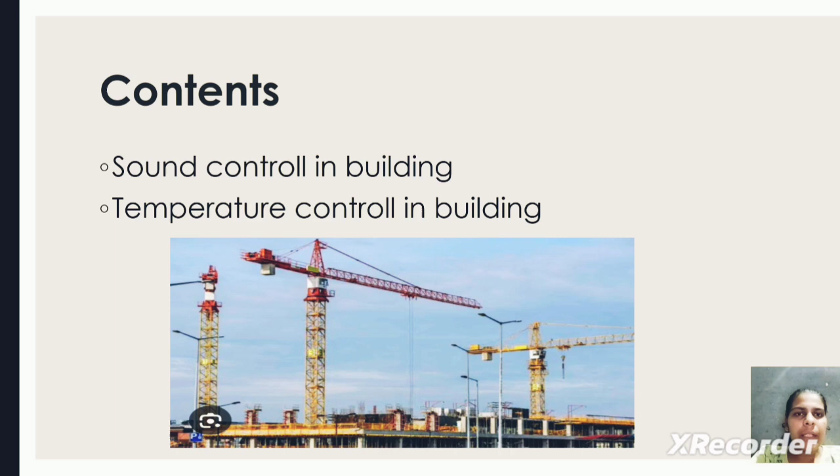I am Meghana Vaidya from Sri Venkateshwara College of Engineering, Bengaluru, from the Department of Basic Science, CSE branch. Now I am going to discuss the subject Introduction to Civil Engineering. In this subject, the subtopic is Explain the Temperature and Sound in Buildings. Contents are Sound Control in Building and Temperature Control in Building.

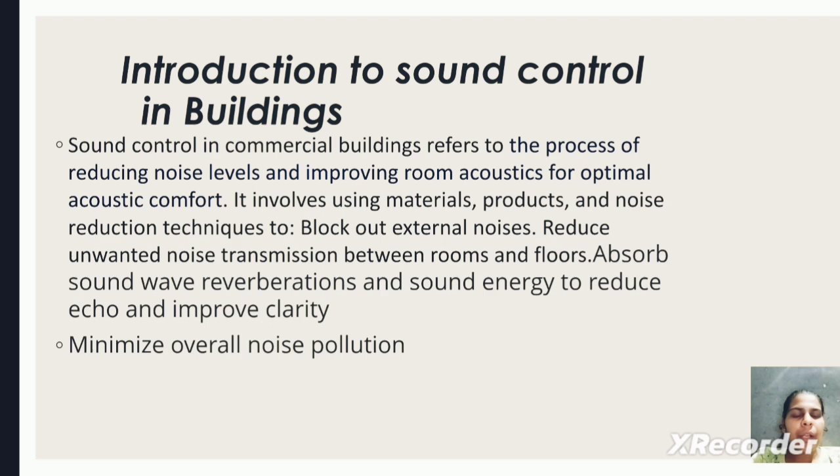Introduction to sound control in buildings. Sound control in commercial buildings refers to the process of reducing noise levels and improving room acoustics for optimal acoustic comfort. It involves using materials, products, and noise reduction techniques to block out external noises, reduce unwanted noise transmission between rooms and floors, absorb sound wave reverberations and sound energy to reduce echo and improve clarity, and minimize overall noise pollution.

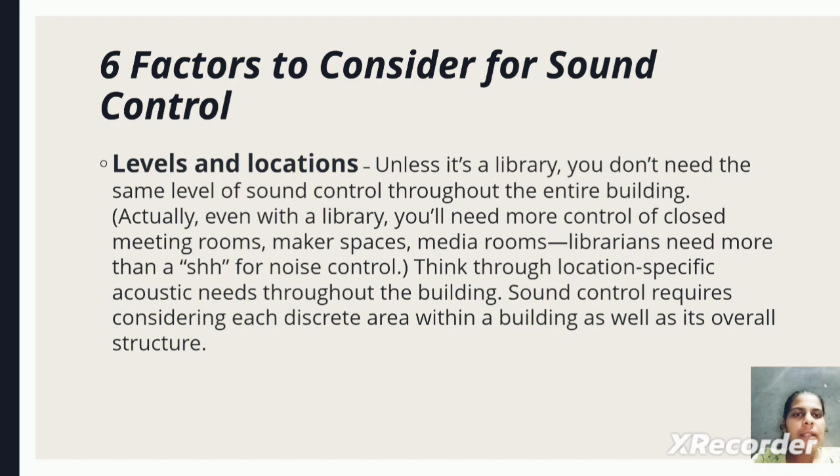Six factors to consider for sound control. First one: levels and locations. Unless it's a library, you don't need the same level of sound control throughout the entire building. Actually, even with a library, you will need more control in closed meeting rooms, maker spaces, media rooms. Librarians need more than a shh for noise control. Think through location specific acoustic needs throughout the building. Sound control requires considering each discrete area within a building as well as its overall structure.

Building age and construction. If you are starting from the ground up, you will have the ability to influence each decision in materials and construction that impact sound control. For businesses in established locations, there are many options to boost acoustic control in buildings besides starting from scratch.

Exterior noise. What excessive noise occurs outside of your building? Are you near an airport or highway, schools, bars and nightclubs, or industrial parks? Identify what sounds you will need to address during current or potential business hours. Internal noise. Loud machinery, water cooler gossip, a call center department, visitors in the mood to party. What will your internal noise level challenges entail? Consider both room constants and periodic or occasional noises, from HVAC to your loudest events.

Balancing priorities. If sound control was your one and only interest, you could create a beautifully silent building. In reality, you will need to balance acoustic concerns against other priorities: how much natural light you want in the business, where to place key entrances, what kind of construction is best for the local weather, and environmental noise concerns. Each of these may conflict with the highest level of acoustic protection.

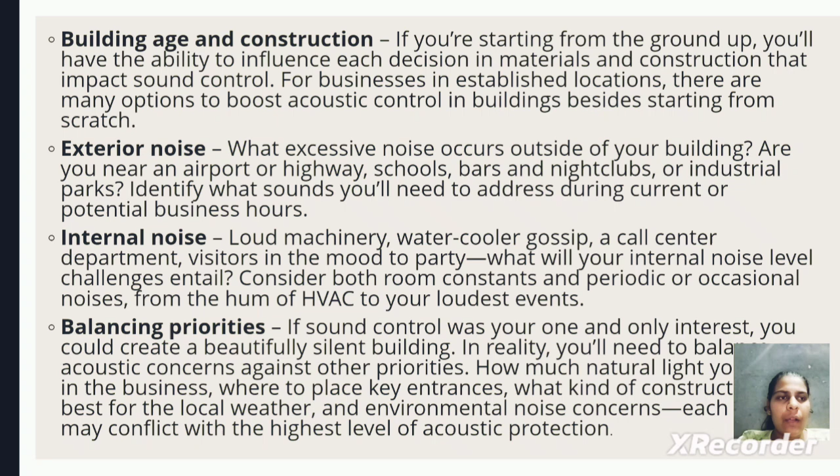Cost. An unlimited budget is a rarity. So, whether you are planning a new build or addressing noise level challenges in a current building, cost will be a factor. On a tight budget, implement lower cost changes first, learn more about how sound control affects your bottom line, and work with an acoustic professional to come up with a right sized plan.

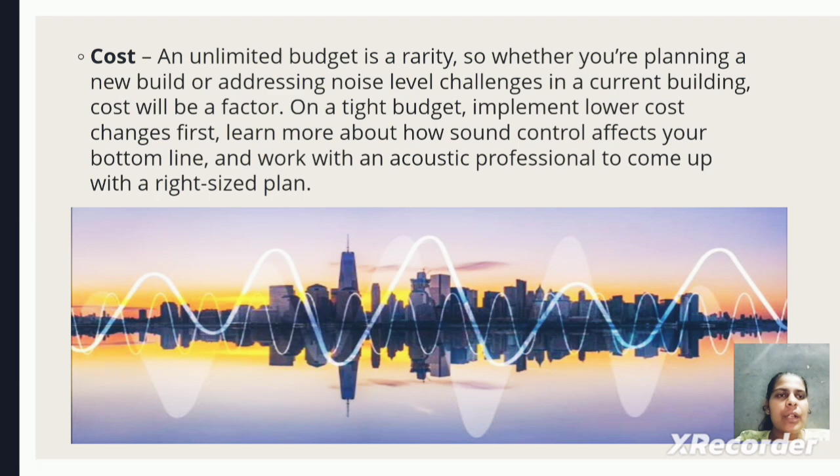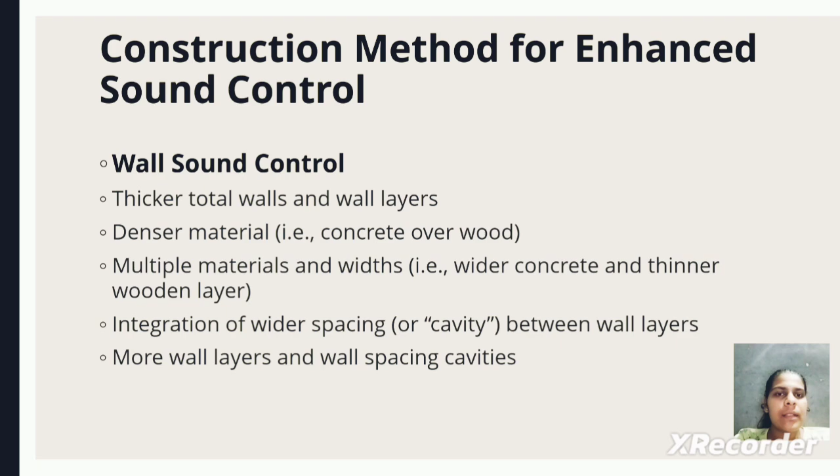Construction methods for enhanced sound control. First one, wall sound control. In wall sound control, there are thicker total walls and wall layers, denser materials like concrete over wood, multiple materials and widths, and integration of wider spacing between wall layers, more wall layers and wall spacing cavities. Window sound control. Multiple layers, including insulating spacing between layers, thicker window glass laminated with shatter and noise resistant plastic. Addition of custom sized acrylic inserts to add to current windows.

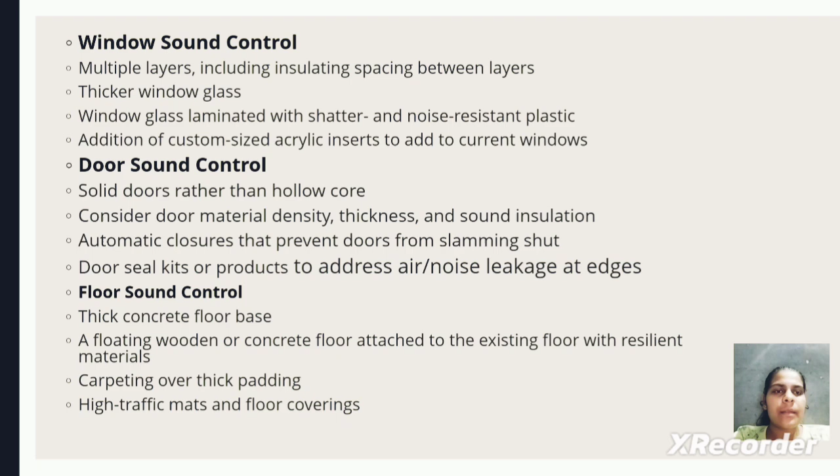Door sound control. Solid doors rather than hollow core. Consider door material density, thickness, and sound insulation. Automatic closures that prevent doors from slamming shut. Door seal kits or products to address air or noise leakage at edges. Floor sound control. Thick concrete floor base, a floating wooden or concrete floor attached to the existing floor with resilient materials. Carpeting over thick padding, high traffic mats and floor coverings.

Introduction to temperature control in buildings. The heat can be directed away to create a cooling effect, or it can be directed into the space to heat the area. This can be done through different materials such as reflective roofing or radiant barriers. There are many ways to regulate heat, such as varying types of insulation and air conditioning. The heat can be directed away to create a cooling effect, or it can be directed into a space to heat the areas.

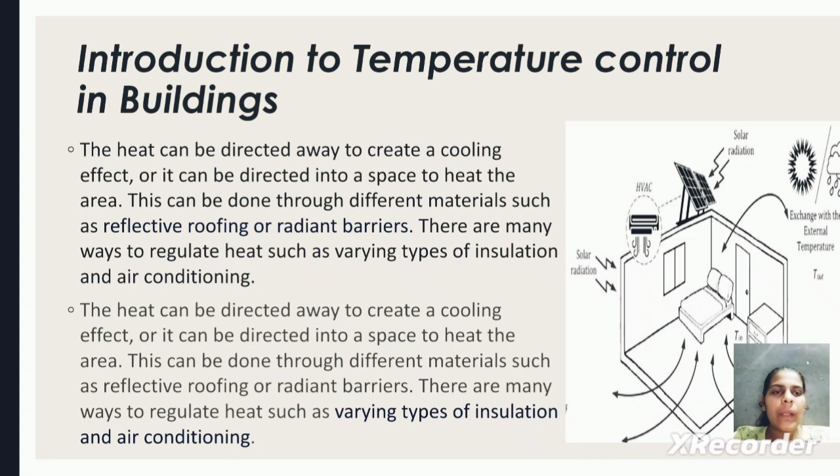This can be done through different materials such as reflective roofing or radiant barriers. There are many ways to regulate heat, such as varying types of insulations and air conditioning. Controlling building temperatures for offices, commercial, and industrial buildings.

In offices and commercial and industrial buildings, controlling the temperature is essential given the long duration of time staff are likely to spend there. Feeling comfortable in an interior space directly impacts a person's mood and concentration. So, by working in optimal conditions, people are more likely to think and work better, which in turn increases productivity

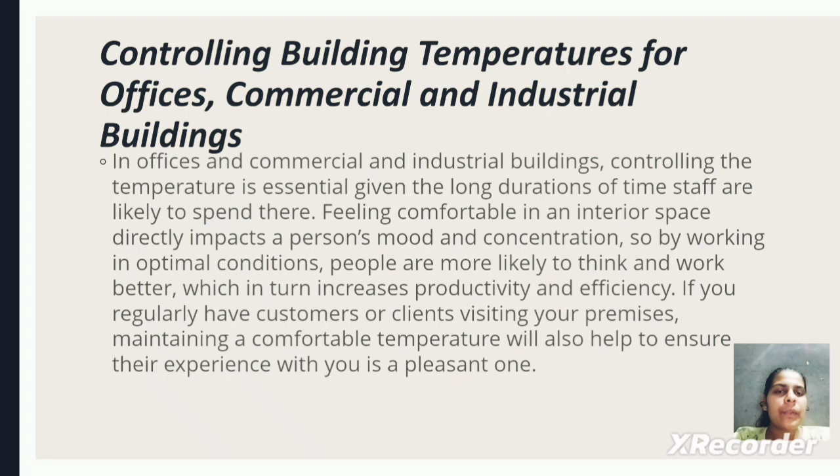and efficiency. If you regularly have customers or clients visiting your premises, maintaining a comfortable temperature will also help to ensure their experience with you is a pleasant one. Building size and layout. The first thing to consider is the size and layout of your building. Large multi-story buildings will inevitably require different systems to a small 4-person office.

For example, you need to evaluate the areas where your staff spend most of their time, and if you keep stock on site, you need to put measures in place to satisfy their needs. Also, how much of your building is exposed to natural sunlight? Do you have large windows? Factors like these all have an effect on how you can best control your building's temperature.

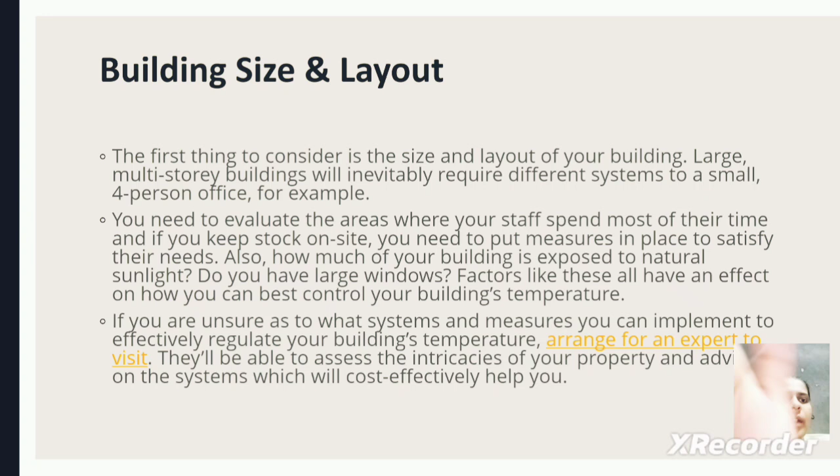If you are unsure as to what systems and measures you can implement to effectively regulate your building's temperature, arrange for an expert to visit. They will be able to assess the intricacies of your property and advise on the systems which will cost-effectively help you. Air conditioning systems.

For many types of buildings, installing an air conditioning or cooling system is likely to be one of the most effective ways of controlling the temperature. In simple terms, they operate by removing the existing heat and moisture in the room and dispersing cold air, therefore cooling down the temperature in the inside space. Various types of cooling systems are available, so your specific requirements will dictate which one is best for you.

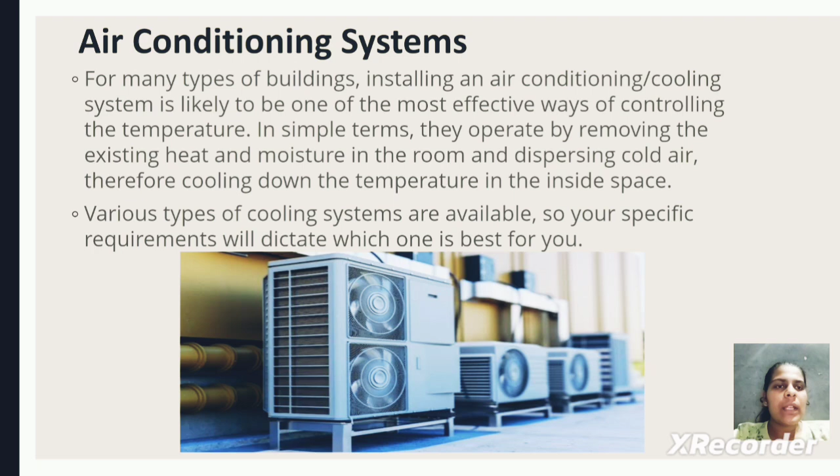Single split air conditioning systems. Single split systems are the most common type of AC systems and are typically utilized by small commercial buildings like cafes, restaurants, and offices. Tending to be cheaper than other types of cooling systems, single split systems are made up of an outer and inner component connected by an electric cable and two copper pipes, which refrigerant flows through to and from the internal and external components.

Multi-split air conditioning systems. Multi-split systems work in an almost identical way to single-split systems. The only difference, however, is that each indoor component doesn't need its own outdoor component. Instead, all indoor components can be connected to a single, larger outdoor component. This type of system is suited to large office spaces, retail shops, and other buildings with numerous walls and/or floors.

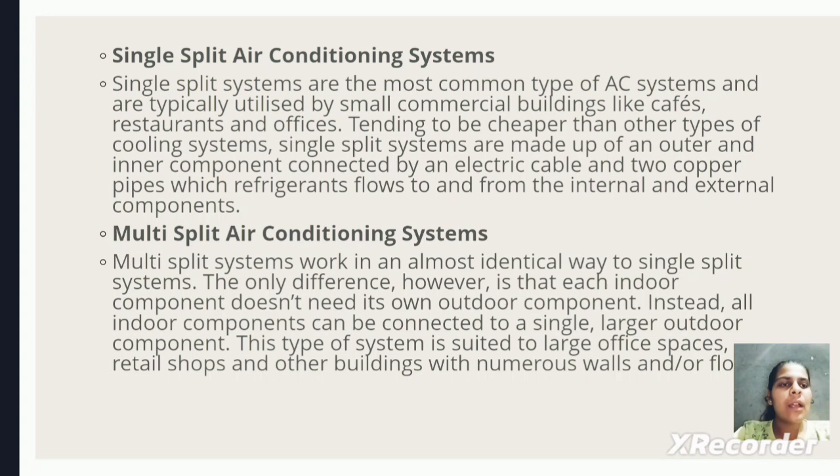VRV and VRF air conditioning systems. Variable refrigerant volume is VRV and variable refrigerant flow is VRF. These systems are often the most efficient option for medium to large size properties like mixed-use buildings or hotels, although they function in the same way as traditional air conditioning systems.

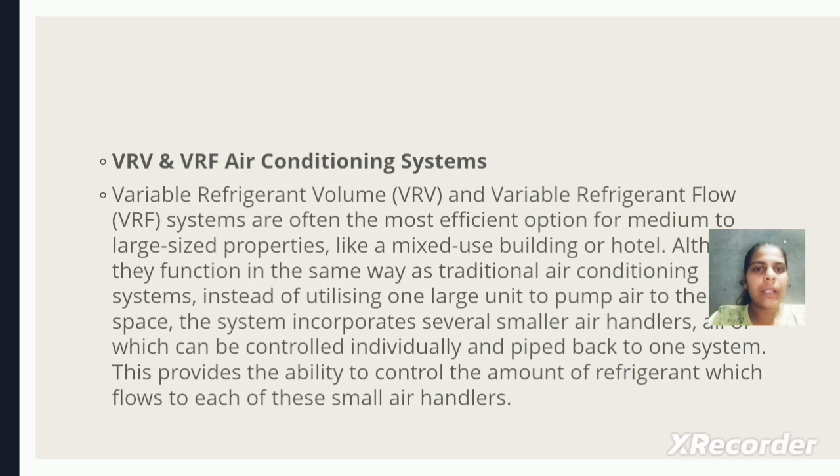Instead of utilizing one large unit to pump air to the whole space, the system incorporates several smaller air handlers, all of which can be controlled individually and piped back to one system. This provides the ability to control the amount of refrigerant which flows to each of these small air handlers.

Heating systems. Another option you have when it comes to controlling your building's temperature is to install a heating system, such as an oil or boiler heating system. Using heating oil or gas, these systems work by heating water that is then used to provide central heating via your radiators as well as provide hot water.

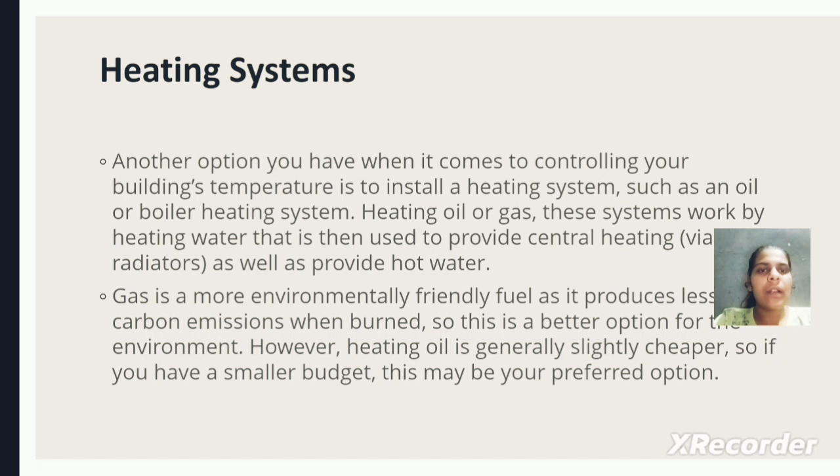Gas is a more environmentally friendly fuel as it produces less carbon emissions when burned. So, this is a better option for the environment. However, heating oil is generally slightly cheaper. So, if you have a smaller budget, this may be your preferred option.